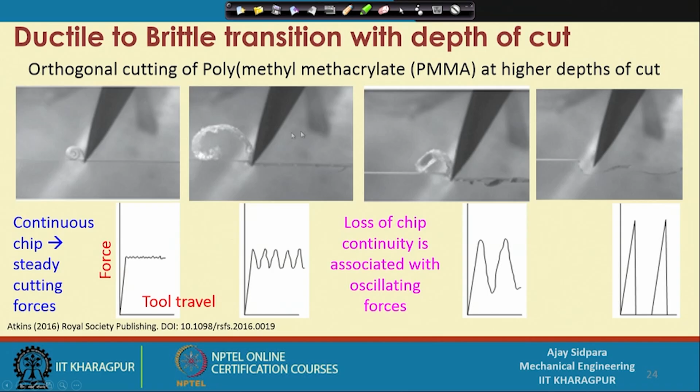So this way we have understood that force data can be one of the important signatures of this machining operation, where you can get some insight into whether the operation is going perfectly right or there are some problems. Now let us see the different mechanisms by which material is removed in alloys.

If you see, this is one of the alloys and there are two different phases available. This is the first phase and this is the bulk material. Suppose this phase material is hard, and the bulk material is a little bit soft.

Now you are cutting this material. When your tool is moving in this direction, this is the location of the soft material, and then suddenly you encounter a phase of this alloy where it is hard. So when you reach this location, the force signature you get will suddenly shoot up because you are coming across this hard grain and you have to cut or pull out this grain.

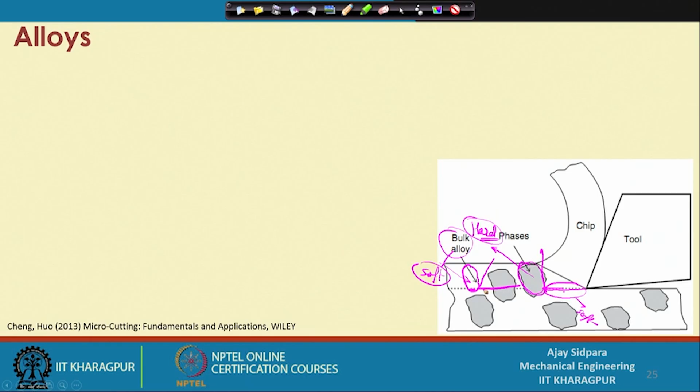Many times the grain is located such that a very small portion is below a particular area where your tool is. In that case the whole grain will be pulled out, because it has a high tendency to become part of the chip rather than part of the workpiece material. So instead of a straight line, the machined surface will look like this, and you can consider this a pull-out.

This often happens in metal matrix composites, shortly called MMC, where you put some type of metals as small grains or similar inclusions. This is also considered an alloy.

Here the force variation is very large, because initially you are cutting in a soft zone, then suddenly hard material comes in, then soft again, then hard again. The location of this hard material also creates a different mechanism, depending on what percent is inside the bulk material and how much is on the chip side — this is called the uncut chip thickness part. All these factors play an important role in cutting this alloy material.

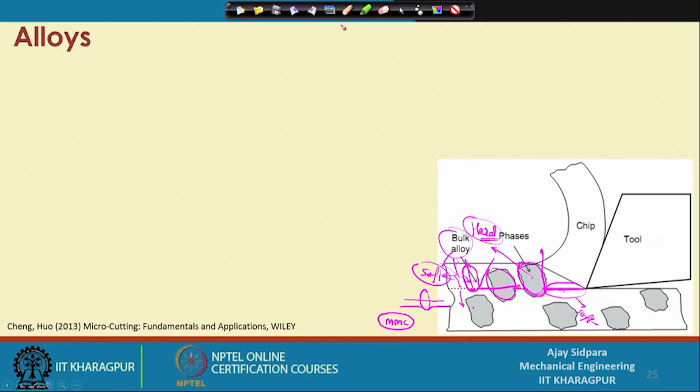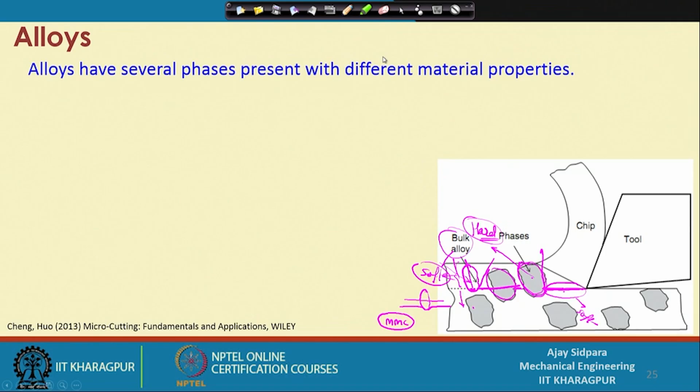Let us go into more detail. All alloys have several phases present with different material properties. These different material properties are mostly related to hardness, because we want to create some type of composite or alloy so that we can get a different property on the surface.

Because of this, the tool's cutting edge individually encounters these phases. Even though they are present at a large scale, in conventional machining it is very easy, because many times this large phase will cut out through this particular boundary.

That is the region by which you can cut down this material efficiently in conventional machining, but that is not happening in micro machining, because even without crossing the phase boundary of the alloy, you end up machining at a different phase — and that size effect plays an important role, as we have discussed previously.

Now, what happens because of this, it creates problems with the forces. The variation will be very high in the forces, and again there is energy, and the surface integrity is also a problem.

Force is, we have seen that whenever it is encountering a soft material, your force level will be very low. So if you cut from here to here, your force signal will start from 0, then it will stabilize a little because it is cutting this particular part, then it will suddenly rise here because you are cutting this part again, then again it will reach this location, then rise again, and something like this.

So whenever you are getting these particular peaks, you can understand how many times your tool has passed through these grains or the different phases of the hard material. So these signatures are important to understand.

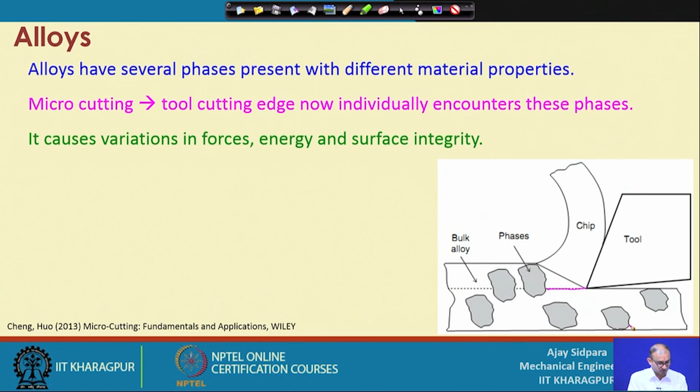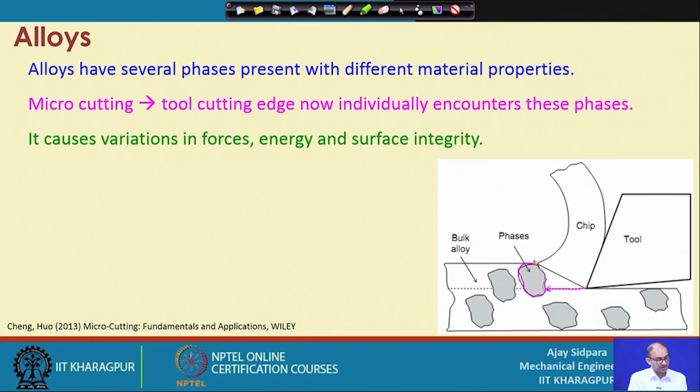Now coming to the energy, because energy also plays a role. When you are cutting through soft material, you do not need very high power or spindle current, but when it suddenly encounters this grain, you have to supply more current to the spindle so it can overcome the resistance of this hard material, and that is the reason your energy variation will be large. Again soft material you do not need so much energy, again hard material you need more.

Surface integrity term is connected with the machined surface, the integrity of the machined surface, because what we are getting here is important.

Sometimes you can see here that this particular grain is mostly located inside the workpiece, so there is a high chance that this particular part is removed by the cutting tool.

Now consider this in particular, let us consider this is the grain. Now it is exactly opposite to this, that only a small portion is located inside the workpiece or inside the machining zone region, but most of it is within the uncut chip thickness. So when these particular things encounter, all this grain will go out, and instead of a flat surface, you end up with a scoop or cavity. So this is what is happening in this case.

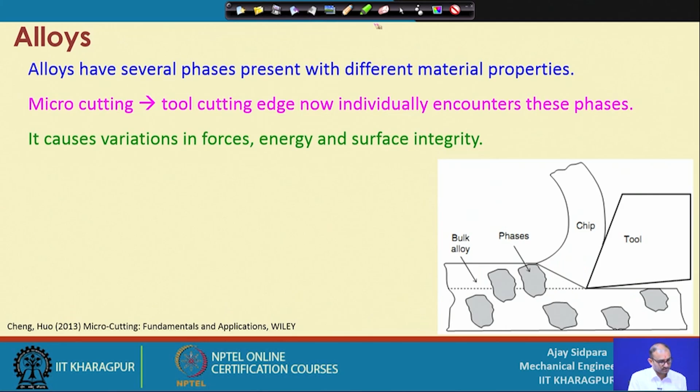Coming to anisotropic material. Anisotropic material means the properties are different in different directions. So if you have an XYZ plane, your material will behave differently in different directions, meaning hardness and some other properties are also different.

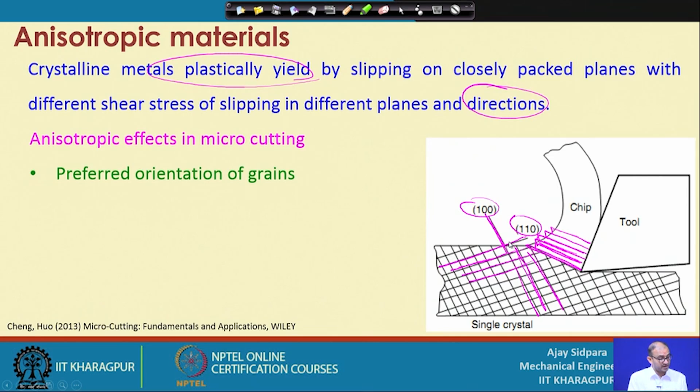So this is the anisotropic effect in micro cutting. Now this we consider as macro machining, conventional machining, but if you scale down the machining operation, what is going to happen? The preferred orientation of the grains. Now, even if you cut an isotropic material, we have seen that we are encountering individual grains.

So whether you are cutting anisotropic or isotropic material, you have to understand the orientation - how much is projected above the line of the uncut chip thickness and how much is penetrated inside. That will decide whether your tool will cut the material or it will all be scooped out along with the chip. So this is one of the material properties - the preferred orientation of the grain is important to understand in the anisotropic effect of the cutting tool.

Then, the number of grains is very less compared to the volume of the deformation. If you see this particular thing, this is the deformation zone, and let us put this whole plane as a shear band, and this particular depth of cut let us consider as 50 microns. So when you are deforming something at a very small scale, you end up with a very less number of grains. This is the volume of the deformation - you can actually count how many grains are available. So this creates a problem.

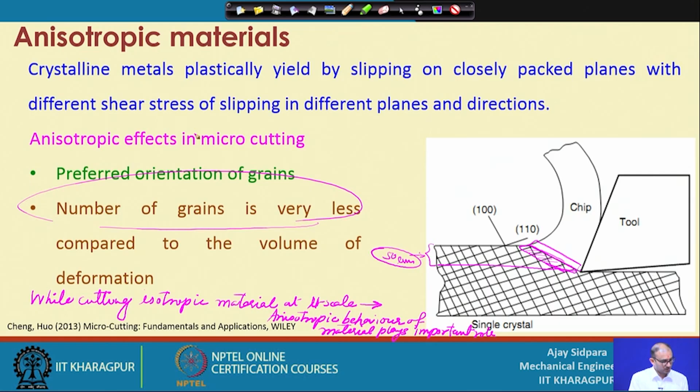So even while cutting isotropic material at micro scale, anisotropic behavior of material plays an important role. This example we have taken for conventional machining, but if you scale down the machining to micro cutting such that you are encountering individual grains, whether you cut isotropic or anisotropic material, you have to consider these two things, and when you do, you are actually looking at the anisotropic material. So this is what happens when you cut a material at the micro scale.

So what happens in this case? The cutting edge encounters individual grains and crystallographic planes in different directions. We know the individual grains we saw in the last slide, and what crystallographic planes these are. So this is one plane, this is the 100 plane, and this is the 110 and 100 plane. So individual grains and crystallographic orientation will be encountered during the cutting operation.

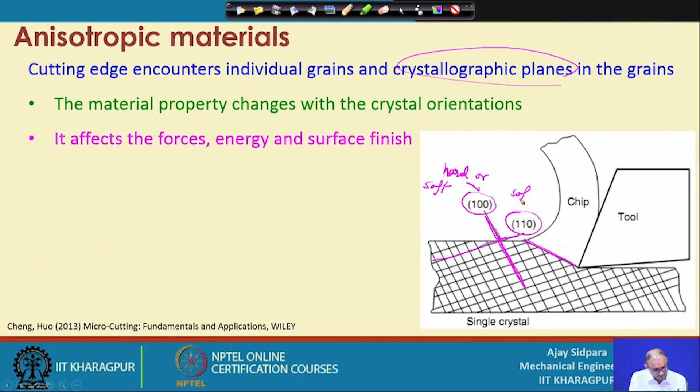So what happens is the material property changes with the crystal orientation, which we will see in the next slide if we take the example of silicon. So now each plane has different properties. We have to find out which particular face is hard, whether this face is hard or soft, or this other one is soft or hard - so which face is hard?

So if you consider this as the cutting direction, and suppose this face is soft, that means this is the soft material. Let us write this one as soft and this one as hard. So the material is weak in this direction.

And it is very hard, or very strong, in this direction. So when your tool is moving in this direction, what is going to happen? Your chances are very high that material will be removed in this fashion, so this whole thing will come out as a chip.

Instead of coming out in this direction, because this plane is very hard in this case. So your material removal is different in different plane directions, and that again affects the forces, energy, and surface finish, because your tool is at one particular depth. The depth will not change during the machining operation.

So what is coming across it plays an important role. When it is coming in this direction, this grain has to be cut out, this grain also, here you are getting the point. It is very easy to cut in this direction, but many times this will not happen. You have to cut this grain, and again the orientation of this grain plays an important role, as we have seen. Then if you continue in this direction, many times you can come across this grain boundary, but many times you may not.

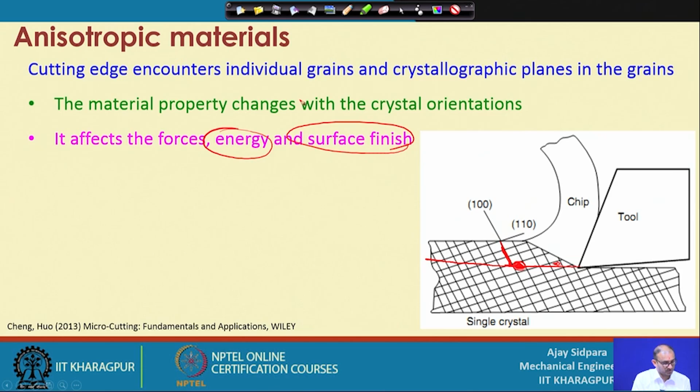So now let us take one example of silicon, and see what happens in silicon.

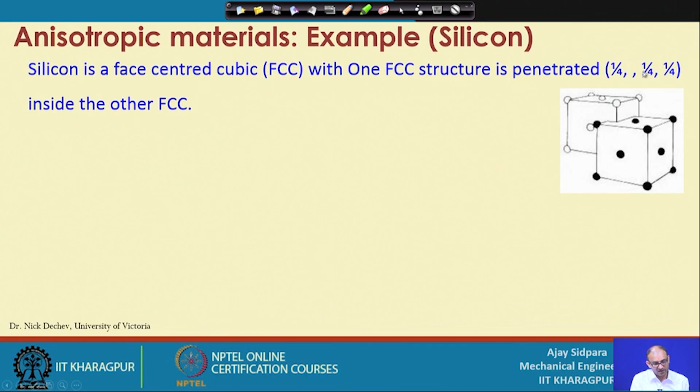Silicon is a face-centered cubic structure, with one FCC structure penetrated to 25% in all three directions inside the other FCC. So these are the two FCC structures. FCC means face-centered cubic, where one atom is located at the center of each face and the other four are located at the corners. This is the first FCC, and the second FCC penetrates with 1/4, 1/4, 1/4 in all three directions. So basically we consider, in an ideal situation, that silicon has this FCC structure.

So what is happening in this case? Now let us draw this whole thing here.

So let us consider this as a block. This is considered as the x direction, this is the y direction, and this is the z direction.

Now if you cut from this one plane, what happens? Let us give a name to this plane also. This is this thing, so this one particular plane is called this plane. This plane is in the x direction only, so this plane is called the 1 0 0 plane, because this plane is not cutting or contacting the y and z plane.

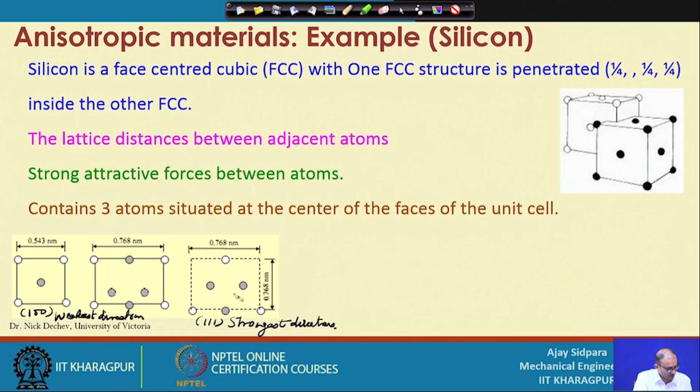And this one is the strongest direction. That means it opposes, or it will actually give more resistance to the material removal mechanism by etching or by mechanical machining also. So how are these things different? So let us see the properties.

So these are the properties. This is the Miller indices, one of the ways of identifying what this plane is, but we will not discuss that here. We consider the 100 plane, that means the face along the x direction but parallel to y and z, it is not crossing y and z. 110 means it is crossing x and y but parallel to z, and 111 means it is crossing all three directions. Now if you see the Young's modulus, it is almost 130 GPa in the x direction, but in this case it is very high, in increasing order.

Shear modulus is also very low in this case. That means your Young's modulus is very high, but shear modulus is low. So in that case, you end up with more strong location in the 111 plane.

What is happening in this 111 plane? Consider you are machining silicon in the 100 plane direction, because the whole structure is coming in its way. If your face is this one, your tool will smoothly pass through this particular face. But if you are oriented such that you end up with this particular location, that is the 111 plane, then removal is very difficult.

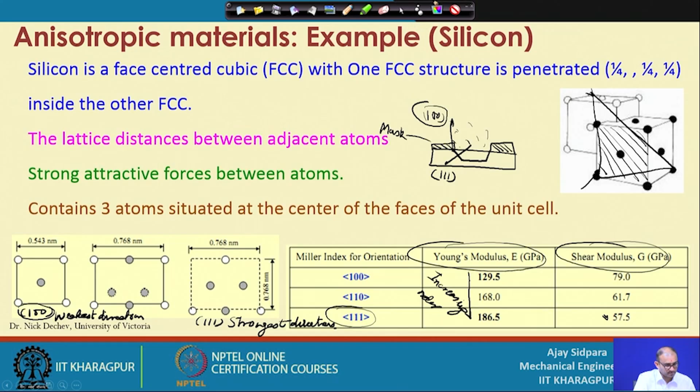So what is the specific cutting energy? Let us see how much energy we have to spend in cutting the material. This is defined as the energy consumed in removing a unit volume of the material.

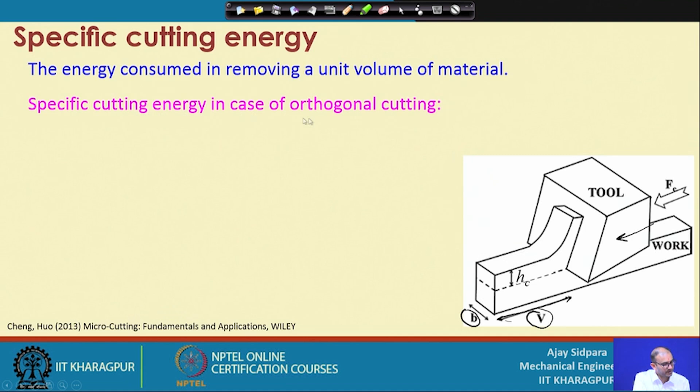What is the equation for specific cutting energy in orthogonal cutting? This is what we are getting, that is the amount of power or energy required to remove a unit of material.

So Fc is the cutting force, this is the cutting velocity, and this is b into hc. So this whole thing will come in terms of millimeter cube by second or minute. With the right term, let us put the second. So this is in millimeter, this is millimeter, this is millimeter per second. So V and V will get cancelled, and then you end up with FC divided by B into HC.

So where does it depend? It depends on the depth of cut, how much is the width. Obviously it will cover the area of this part, and then how much is the cutting force in this case. Now if you see this example clearly, if you reduce the uncut chip thickness, that means if you reduce the depth of cut, then obviously your force will be very, very small, correct?

Because here we want to remove a small material, suppose this is the depth of cut, and now this is the depth of cut. So in this case, the smaller the depth of cut you give, obviously your force is small.